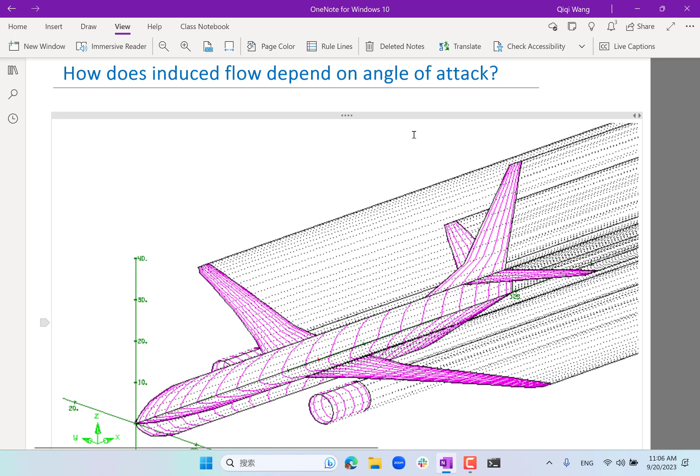So today is the first lecture of zooming in. Instead of looking at the far field, we now start to look around the airplane. Around the airplane, it's no longer sufficient to think about the flow as two trailing vortices going from the wingtips to infinity.

We now have to consider that there is a distribution of trailing vortices coming from almost everywhere on the wing. Whenever there is a change, a gradient of lift per span, there is going to be a vortex coming out. The only time when there's no vortex coming out is when you have uniform lift per span, so the circulation around the wing would be constant as you move along the span, and no vortex has to come out.

As long as you have a change of circulation as you move along the span, that change actually has to come out of the control volume. If you draw a control volume where one side is over here, and the other side is over a different location around the span, and you connect these two faces to form a closed control volume...

Any circulation on the green control volume has to be an integral of vorticity going in. Any circulation on the black volume has to be vorticity coming out. If there is a difference in circulation, and given that vorticity cannot have any divergence—meaning the total integral of the flux of vorticity in the control volume has to be zero—then if there's a change in circulation between the green and black contours, there must be vorticity coming out of the red surface connecting them.

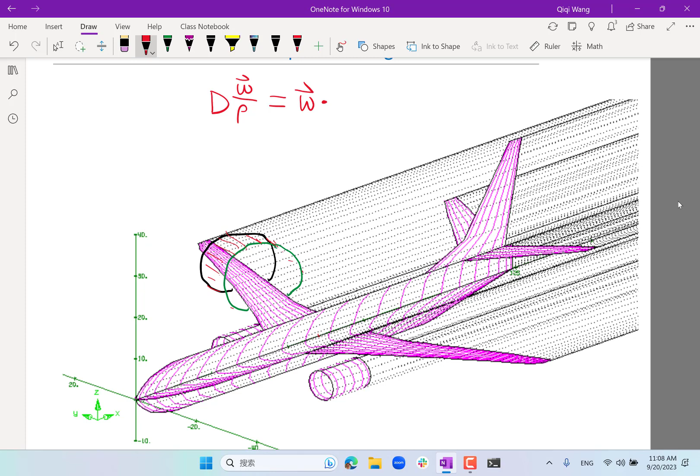We've looked at the evolution of the vorticity equation, which tells us that any place in the flow field where you find non-zero vorticity would be downstream of a solid surface. Remember our evolution equation: the material derivative of omega over rho equals omega dotted with the gradient of the velocity field. This basically says that if omega is zero upstream, there cannot be any material derivative of omega, meaning omega would not increase from the existing zero value.

So the only place where vorticity would be non-zero is in the wake. That means if there's a change of circulation along the span, there's going to be non-zero vorticity coming out.

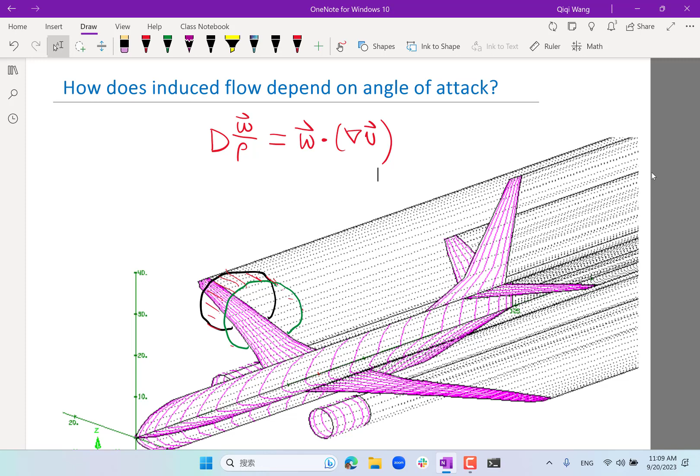So today let's look at first how the induced flow by the collection of vorticities that comes behind the trailing edge, and the vorticities bound in the wing, would depend on angle of attack as we change it.

One of the nice things about incompressible potential flow is the flow field. Let's say the induced flow is UI. One nice property is that this can be expressed as U induced zero at zero angle of attack, plus the angle of attack alpha times UI prime.

So in other words, the induced flow is an affine function, sometimes called a linear function of the angle of attack. For example, if all the airfoils are symmetric and have zero incidence angle to the airplane, then the induced flow at zero angle of attack would be zero, because nowhere has any lift. The induced flow is then just proportional to the angle of attack. If there are any incidence angles or non-symmetric airfoils, there is going to be some fixed induced flow at zero angle of attack, and then the additional induced flow at non-zero angle of attack would just be linear with respect to the angle of attack.

So let's start by looking at why this is the case, and what condition the flow field has to satisfy. First, in the free stream, away from the airplane and away from the lifting surfaces, the flow has to be a valid flow field, and that is automatically satisfied if you construct the flow field as the summation of the induced flow fields by a collection of vortices. The induced flow of any vortex is a valid flow field, and if you add them together, it is going to be a valid flow field. So that is correct by construction. But there is an additional constraint the flow field has to satisfy.

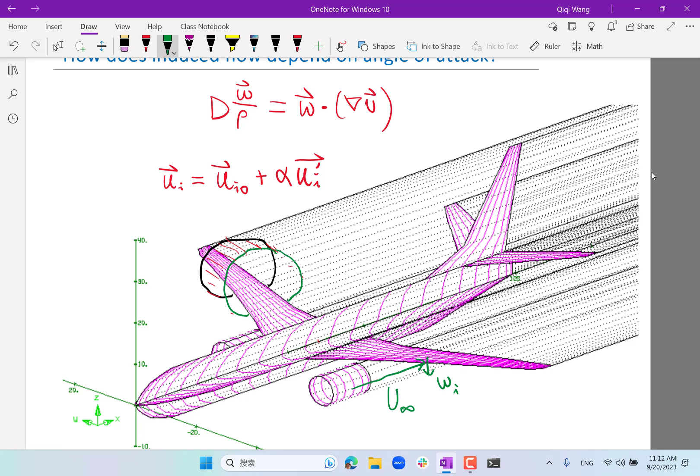That is the relationship between induced flow on the wing. So if you have, for example, an induced downwash, let me just call it W induced on the wing — that induced downwash combined with the free stream, U infinity, forms an angle of attack. The free stream has an angle alpha with respect to the axis of the airplane, so that's basically the angle of attack of the airplane. So U infinity combined with the induced flow is going to modify the angle of attack on this particular cross-section of the wing, and that modified angle of attack leads to a lift.

The angle of attack plus the airfoil cross-section is going to determine the sectional lift coefficient on the cross-section. And that is going to give us, through the Kutta-Joukowski theorem, the lift per span — lift per span is equal to some function of the local circulation on the cross-section. That's something you should have studied in unified fluids.

So let me just spell it out: the Kutta-Joukowski theorem. Lift per span is the circulation times rho times U infinity. So basically that relates how much circulation you have inside the wing, around the wing, with how much lift you have.

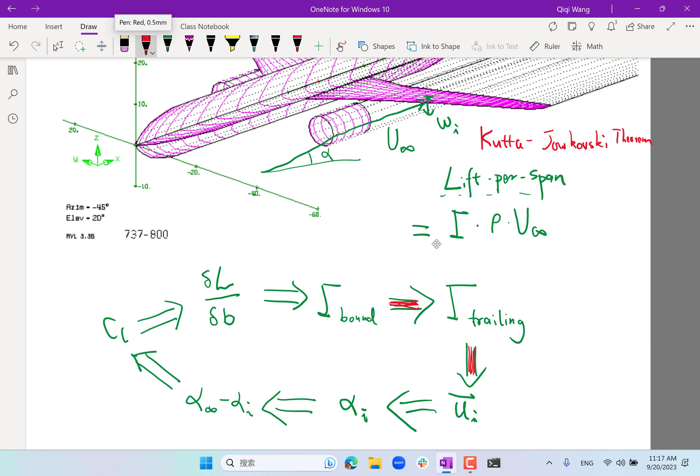From the bound vortex to the trailing vortices, it's a non-local dependency, because you have to take the derivative of the bound vortices to get the trailing vortices. And from the trailing vortices to the induced flow is also global. It requires an integral, not just a derivative. You have to integrate the induced flow coming from all the trailing vortices. And the rest, from the induced flow to the induced angle of attack and to the angle of attack seen by the cross-section to the lift coefficient, these are all local effects.

What do you mean by induced angle of attack? That's a good question, let me explain further. The induced angle is the angle between the free stream and the flow field seen by the cross-section.

The green arrow is the free stream. If you add the free stream with the induced flow, the purple arrow is the flow field seen by the cross-section. The angle between the free stream and the flow field seen by the cross-section is alpha induced. That is why the actual angle of attack seen by the cross-section is alpha minus alpha induced. Let me call it alpha infinity, and the green one is alpha infinity.

Make sense? It's the alpha infinity minus alpha I that determines the local lift coefficient.

Let's start to look at this dependency here, and especially the linearity of it. From the lift per span to the strength, the circulation of the bound vortex, as we see from the Kutta-Joukowski theorem, it's a linear relationship. If the lift per span doubles, the circulation doubles.

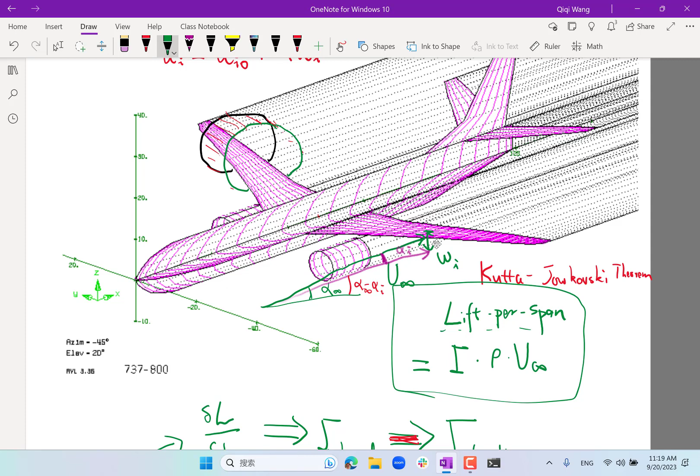And from the bound vortices to the trailing vortices is also a linear relationship. It is basically taking the difference between the circulation on different cross sections to get the strength of the trailing vortices. A simple difference is a linear relationship.

And from the trailing vortices to the induced flow, that's the Biot-Savart law. That's also linear. If you remember the integral, if the circulation doubles, the induced flow would just double.

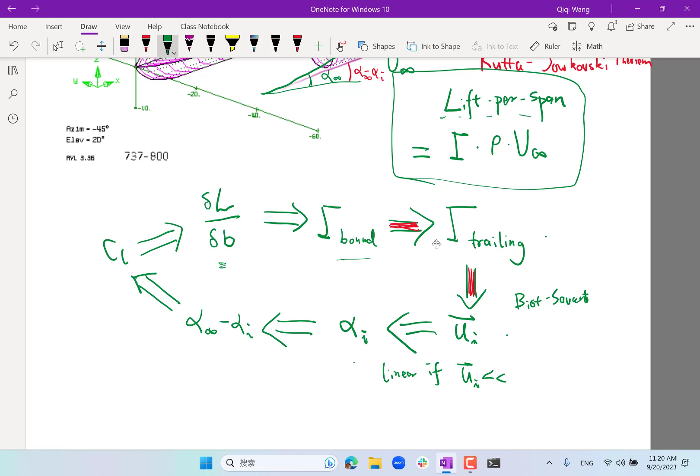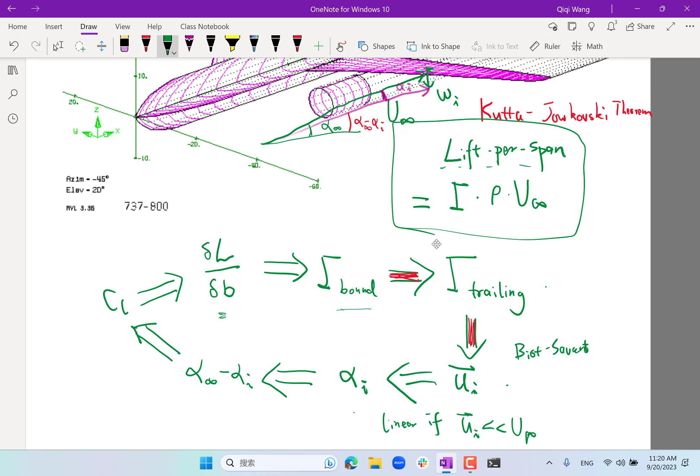And from the induced flow to the induced angle, we are just dividing the vertical component of the induced flow by the free stream velocity to get the induced angle. This is linear if ui, the induced flow, is much less than u infinity. So if the induced flow is very small, the alpha i angle would just be computed by dividing wi by u infinity.

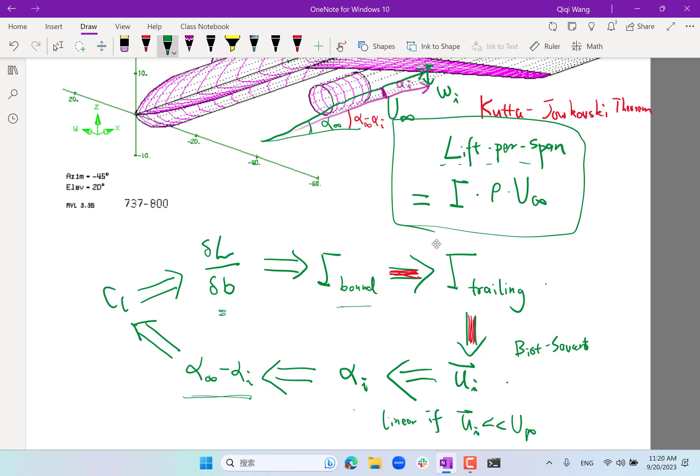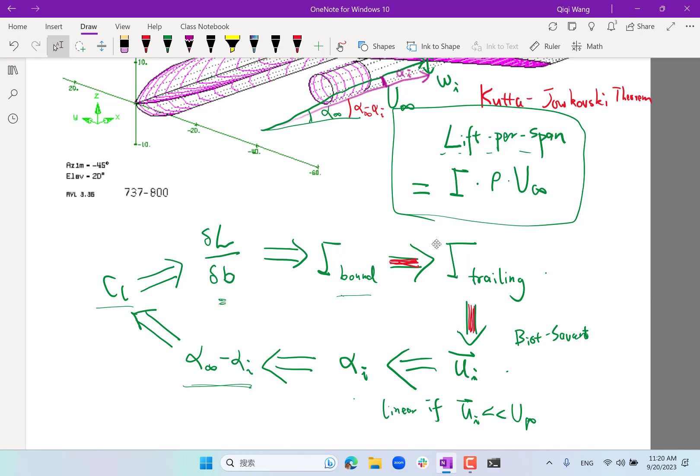And then from the angle of attack seen by the airfoil to the lift coefficient, as we learned in unified, if we assume the airfoils are inviscid and use thin airfoil theory, the lift coefficient CL would be equal to CL0 at zero angle of attack plus 2 pi times alpha infinity minus alpha I. Again, it's an affine relationship.

And of course, from CL to the lift per span, it's just a multiplication of half rho v infinity squared times the local chord length. So that completes all this relationship.

Every relationship is linear or affine, which means we get a global, not local, system. The linear relationship may be between the induced velocity at one point and the trailing vortices at a different point, but the whole thing is linear, meaning if we put all of them into equations, they are all linear equations - a system of linear equations. You can, for example, use the strength of the bound vortices as unknowns and solve them, and the result is going to be a linear or affine function of alpha infinity.

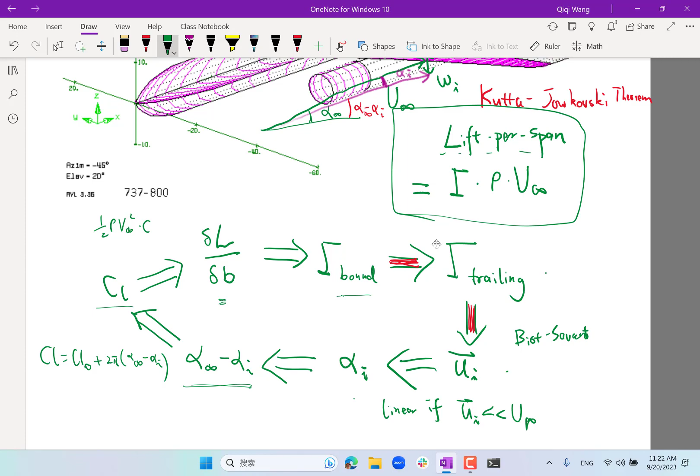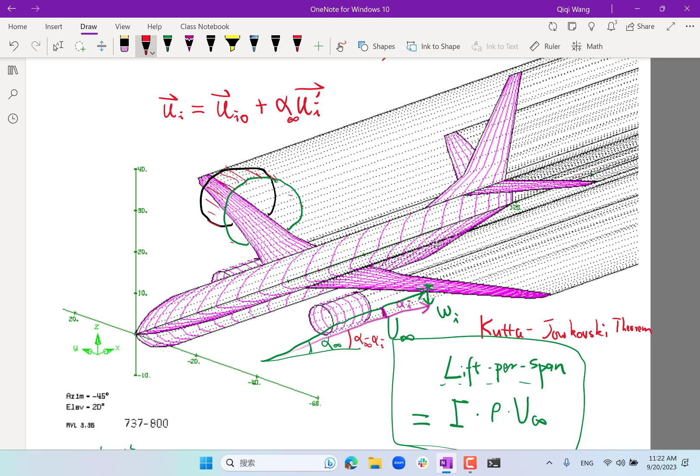This logic tells us that the induced flow can be expressed as a zero angle of attack induced flow plus a linear term that depends on the angle of attack seen by the entire airplane. Any questions on this linear relationship and the solution being linear with respect to alpha infinity?

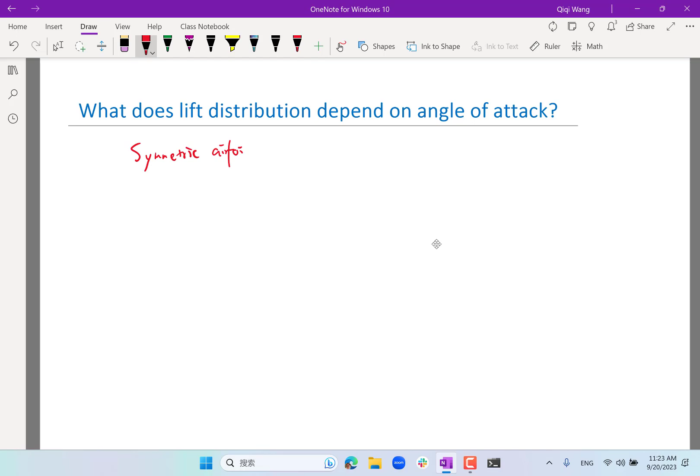Okay, so as an example of how the lift distribution depends on the angle of attack, let's review the optimal elliptical distribution on the elliptical wing. Let's assume we have symmetric airfoils, an untwisted wing, and an elliptical planform.

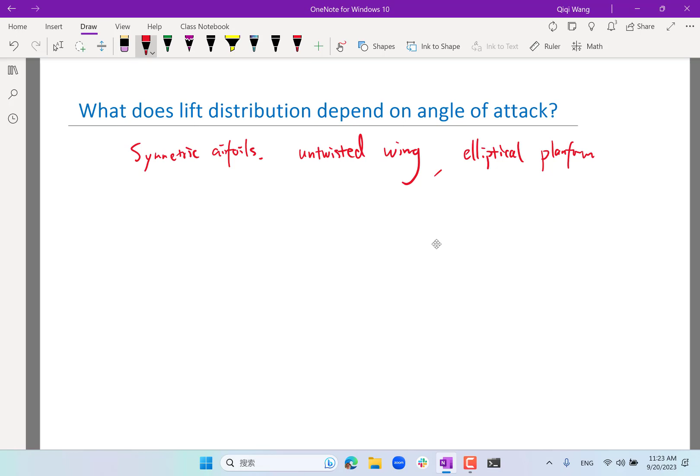Okay, so we know that at any angle of attack, an elliptical distribution is going to create a uniform downwash on the entire wing. I think at least when I look at old unified notes, there is the derivation where the induced flow is actually equal to the lift coefficient divided by pi times the aspect ratio, which is b over c. Have you seen this equation? Yes? No? I see some people shake their head, some people nod, so I'm a little confused.

Okay, so have you analyzed the elliptical distribution as being optimal in the sense of least induced drag? Have you looked at the elliptical lift distribution at all? No? Not really? Okay.

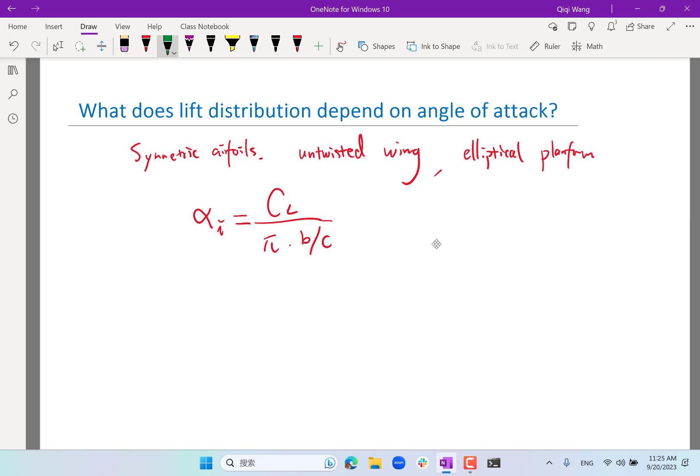Sure, so maybe the most important thing I should say is let me put some sections on Anderson's for you to read about the elliptical distribution. The derivation itself is not as important, the most important thing is the intuitive understanding. So let me draw a box over here that introduces the elliptical distribution.

Okay, so if you have a uniform lift distribution, the lift is uniform across the whole span. What is the system of trailing vortices coming out of the wing? Just the application of what we discussed on the previous slide. Where does the vortices come out? Only at the wingtips, exactly. We are only differentiating the lift per span at different cross sections to get the trailing vortices. So the gamma would be concentrated at the wingtips.

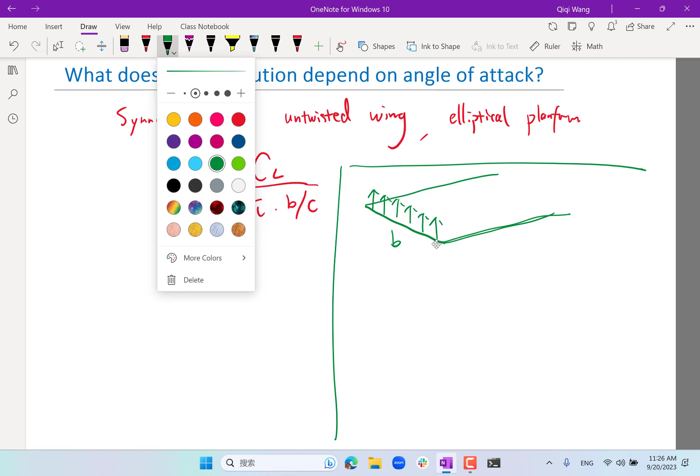As a result, that's something from your homework if you started it. What does the downwash distribution look like along this wing? Is the downwash maximum in the center or maximum at the two ends? At the two ends, right? At the center it has minimum downwash, at the two ends it has maximum downwash. So let me say the green is lift, and the downwash distribution looks pretty much like that.

And as a result, the lift at the two ends is going to be tilted back a lot. If you integrate the tilted back lift, you're going to see a very inefficient lift distribution, in the sense that to create the same lift, it tilts the lift backward by a lot. Similarly, if you look at the induced flow in the far field, you're going to see very high velocity around the concentrated vortices, and lower velocity in the middle. So the concentrated velocities around these vortices introduce a lot of kinetic energy, a lot of low pressure regions.

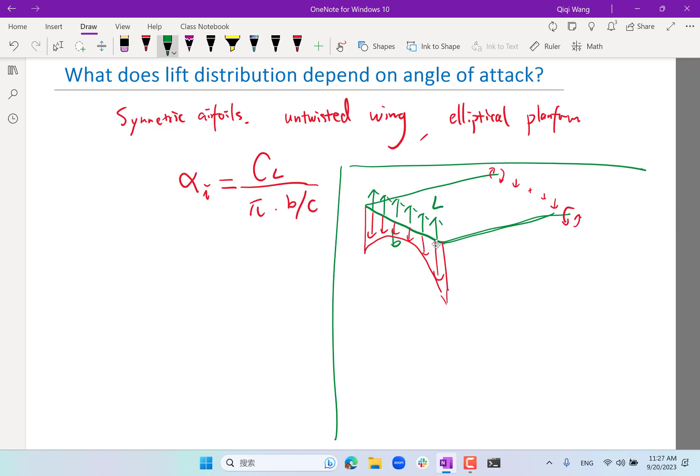That's going to give you a lot of induced drag. So both from a near field and far field perspective, the uniform distribution is very inefficient. An efficient distribution of lift can be analytically worked out to be something that has lower lift per span at the two ends and maximum lift per span in the middle. And the analytical solution turns out to be an elliptical distribution.

So basically the lift per span is proportional to the square root of 1 minus y divided by b over 2, squared. So what that means is that if you draw a line that encompasses the tip of the lift distribution, that line is half of an ellipse. And so if you look at the trailing vortices coming out of that distribution, what does it look like?

Is the vorticity still coming out as two concentrated vortices at the wingtip? No, right? Still, the concentration is going to be maximum at the wingtips because the derivative of this lift per span function is maximum, actually infinity at the two ends. But the strength is going to be complemented by weaker vortices in the middle. These weaker vortices in the middle would actually create an upwash as opposed to downwash at the wingtip, which balances with the downwash created by the two concentrated vortices at the wingtips, and as a result, the downwash from this elliptical lift distribution would actually be uniform.

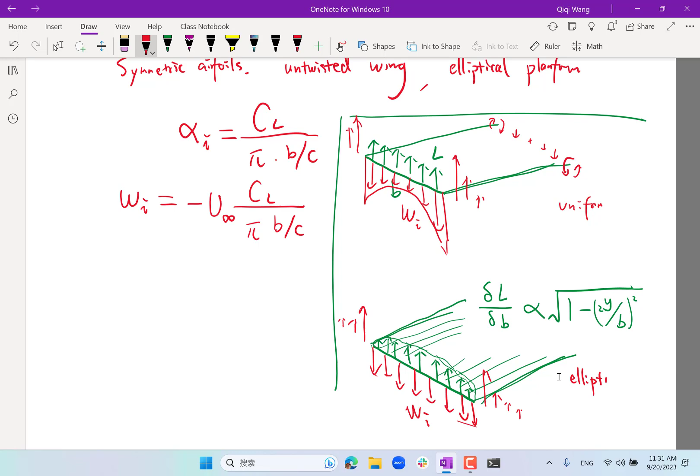Beyond the wingtips, there is still kind of an upwash that decays as you go to infinity, qualitatively similar to what happens for the uniform distribution. So this is uniform, and this is elliptic distribution. Okay, any questions on this?

So that's I think the extent of what was previously taught in Unified about this. No, it's no longer. Okay, so on 3D finite wings, what is the end of the lectures? Like where did you go to?

Okay, anybody remember what is the extent of the coverage on 3D wings? We did the kinetic energy induced drag, the elliptical lift distribution, induced drag, but not much else.

Okay, so the derivation is a little bit mathematical. It's not really that important to actually follow completely. The only thing you need to know is that for a fixed span, this kind of distribution is optimal. There is a bit of discussion in the sense that the actual aircraft strictly follows the elliptical distribution, that's at the time when this derivation first came out. But later on, people found out that if you don't fix a span from a strictly aerodynamic point of view, instead of fixing a span, it is more efficient to fix the weight of the wing and optimize the induced drag.

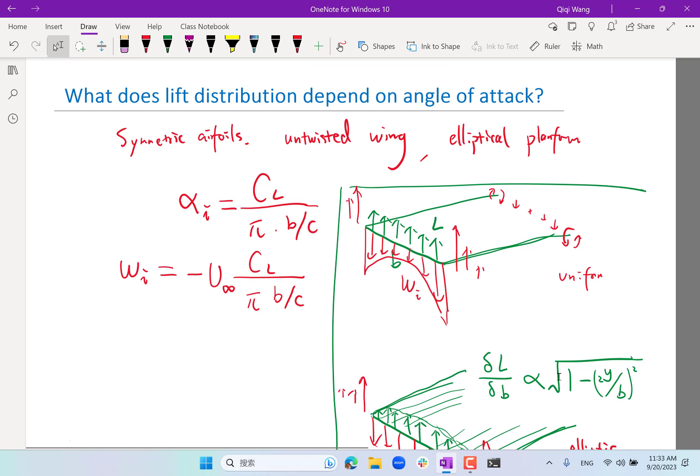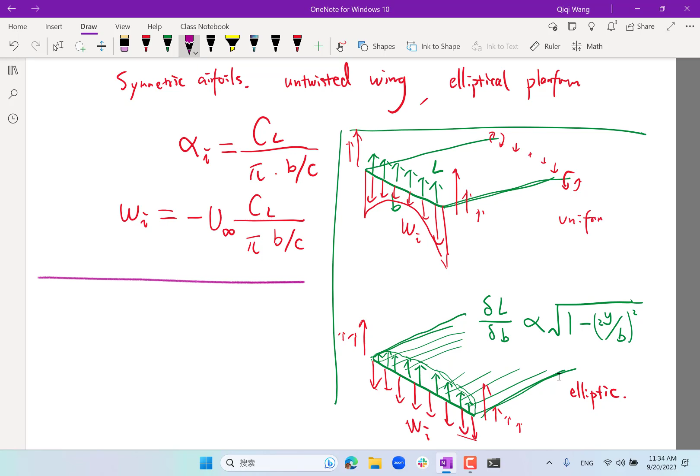Okay, so this is a special case where you have uniform distribution of lift, and if you do have an elliptical lift distribution, but actually have an elliptical planform, let's actually look at what happens. A planform means that not only the lift distribution, but the chord length is proportional to the square root of 1 minus 2y over b squared. So that's a wing that looks basically like an ellipse. So that's what the airplane would look like roughly.

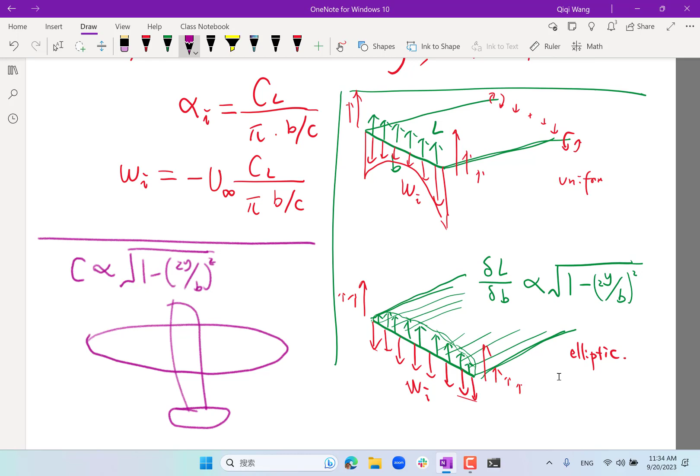Okay, so if you have a chord distribution like that, you can actually work out what happens. Not only is the lift distribution going to be elliptical at any angle of attack, that's basically what's special about the elliptical planform. This is because everything in the loop is consistent. So now let's actually try to go through this exercise, go through the loop for this elliptical planform with a symmetric airfoil and zero twist, okay, to see what's happening throughout this loop.

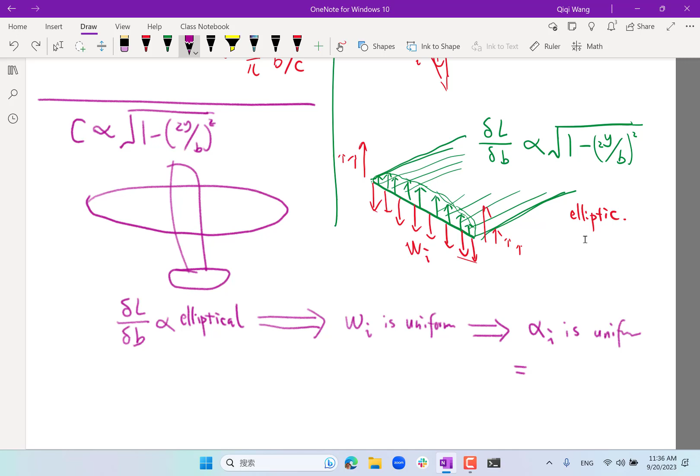So first of all, let's see that if we have a lift per span that is proportional to this elliptical function, what that means is the trailing vortices are going to come out in a particular way that leads to the induced flow being uniform. If the induced flow is uniform, then the induced angle of attack is uniform. And actually, we know how it works out, it works out to be basically the induced flow divided by u infinity, which gives us the classical formula of the induced angle for an elliptical distribution: CL divided by pi times aspect ratio.

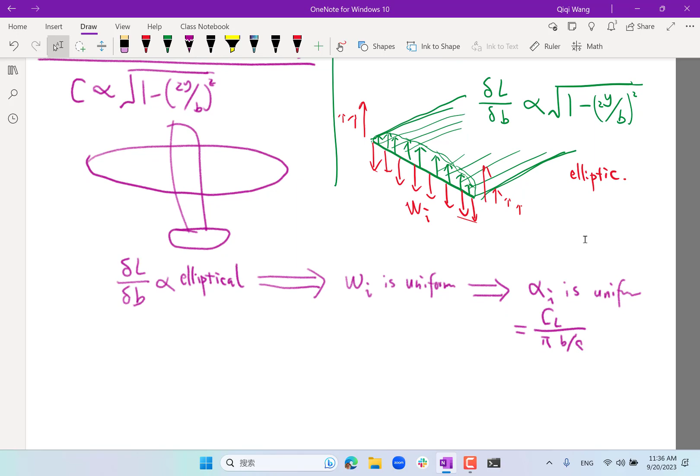Okay, so now if the induced flow is uniform, that means that the angle of attack seen by every cross section is actually the same. So basically alpha infinity minus alpha i would be CL divided by pi b, is actually equal to alpha infinity minus CL pi b over c. And that leads to the lift coefficient. So lift coefficient is, let's assume the thin airfoil theory result to be true, so reality might be a little bit different from 2 pi, but not that much different. So CL is going to be 2 pi times that angle, which means it's 2 pi times alpha infinity minus CL.

And by the way, if every cross section sees the same angle of attack, then the overall CL of the wing is actually the same as each individual uniform CL of the different cross sections. So that actually gives us an equation to solve. And not only that, the CL can be computed as a function of the local angle of attack, it actually is a function of the global angle of attack. And that CL goes back to the elliptical lift distribution, because the CL is actually the same across different cross sections. And to get the lift per span, you just multiply CL by the dynamic pressure, half rho v infinity squared, which is constant for different cross sections, and further multiply by the chord length, which is elliptical. So this is basically because of the elliptical chord distribution.

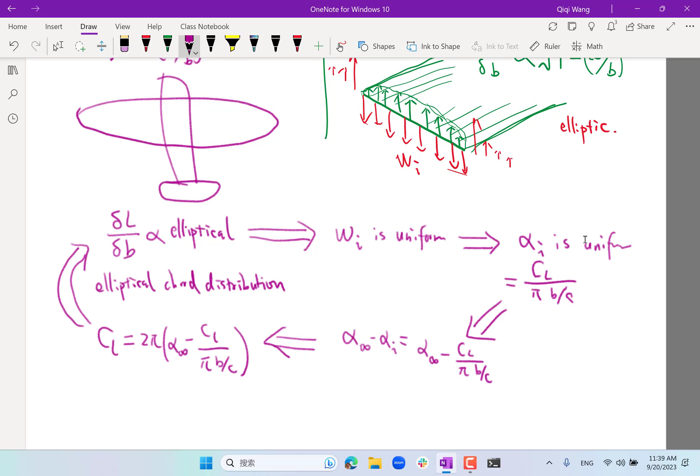This also helps us work out the lift coefficient. If you solve this equation by collecting the terms, you get CL times 1 plus, moving the other CL term to the left hand side, plus 2 divided by aspect ratio equals 2 pi alpha infinity. Or CL equals 2 pi divided by 1 plus 2 over aspect ratio, times alpha infinity. That's nice because it also tells us for different aspect ratios how the lift coefficient depends on the overall angle of attack.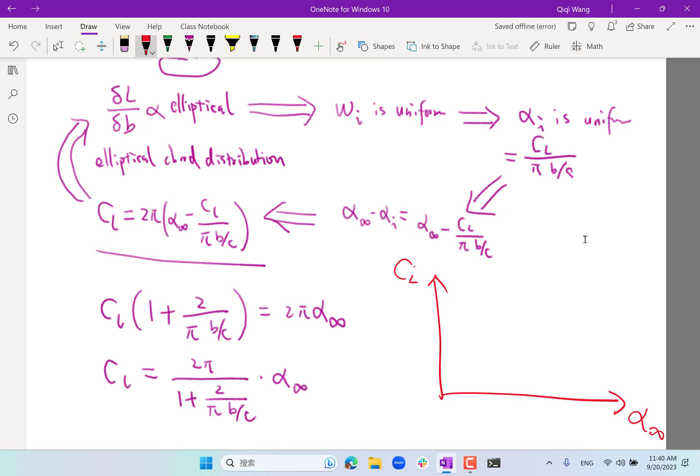So if this is alpha infinity, this is lift coefficient. If you have infinite aspect ratio, the denominator is just 1. You would have a straight line that goes up to 2 pi alpha infinity.

On the other hand, if you have a non-infinite aspect ratio, you're going to have a slightly larger denominator, and the line would be slightly lower. For example, if you have an aspect ratio of 8, then 2 over 8 pi is about 1 over 4 pi. So if B over C is 8, you get 1 over 4 pi, which is about 1/12, so there's about a 1/12 difference between the actual slope you get versus an infinite span glider.

That gives you a sense of how big the discrepancy is. It's not that significant for high aspect ratio, but it really starts to bite you if you have an aspect ratio of like 2-3 or something like that.

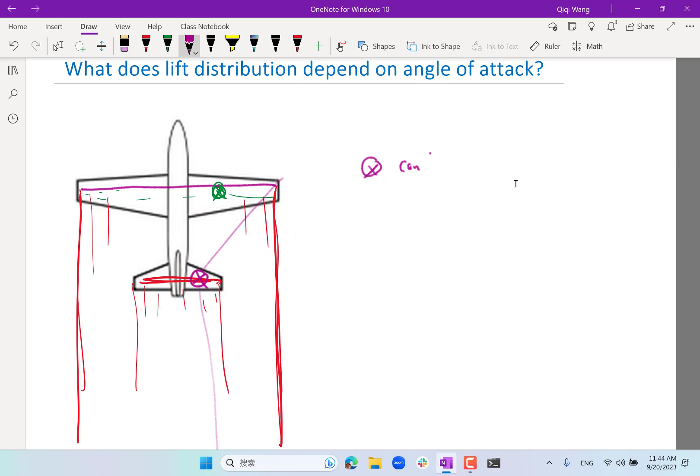So the induced flow on the tail can be several times larger than the green one. And plus, the horizontal tail does not affect the wing much because all the vortices go downstream, and if you think about downstream vortices affecting upstream flow, it's very minimal. But it does have an influence on itself.

In the previous slide, we looked at how the induced flow alpha I is a function of CL. So the alpha I on the horizontal tail can be a much stronger function of alpha infinity, the angle of attack.

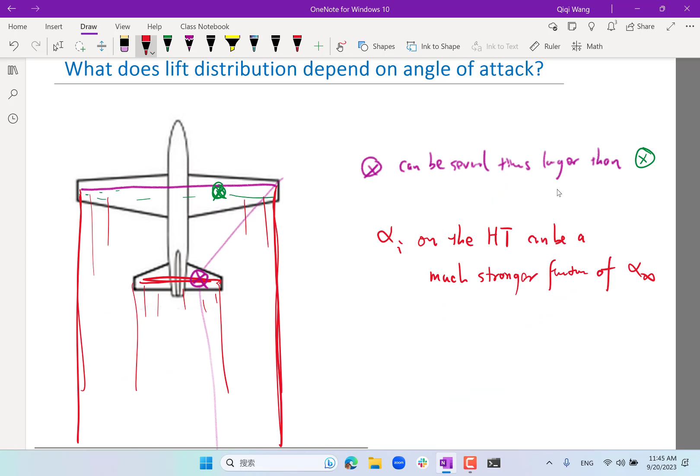So what is the result of that? If you think about the previous plot, the gap between these lines is due to the induced angle of attack. So what this means is that if you think about the CL on the horizontal tail versus alpha infinity, the deviation of that from the 2 pi alpha infinity line, the gap, is going to be much larger.

All right, does it make sense?

Basically, if you change the overall angle of attack, the strength of vortices on the main wing increases, and the induced flow from the main wing's vortices on the horizontal tail is much stronger than the effect of induced flow on the main wing itself. As a result, the angle of attack seen by the horizontal tail is not going to be as sensitive to the overall angle of attack as the angle of attack seen by the main wing.

So what's the consequence of that to the effectiveness of the horizontal tail? Why do we use horizontal tail over here? I guess you have more control, like more control and stability.

Yeah, more control is one thing, stability is another thing. Control is done by the elevator moving, either changing the camber or moving the horizontal tail as a whole. But the horizontal tail existing here is for stability.

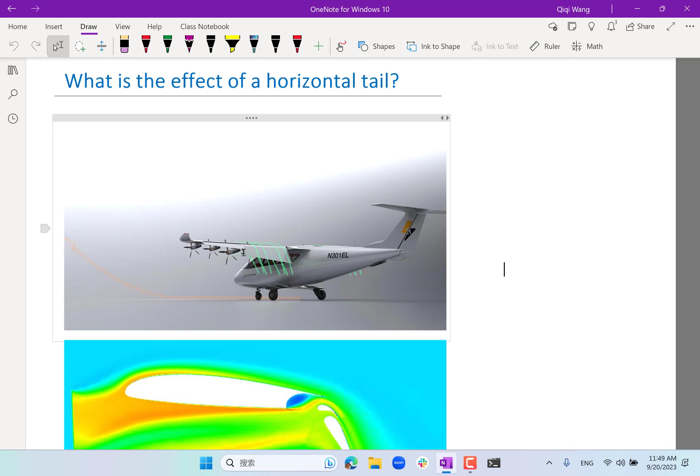So that's actually especially important if you look at some of the newer concepts. One of the startups coming out of this department is called Electra.aero, and it uses electrical propulsion to have an array of propellers blown onto the main wing, with a very large set of flaps.

As a result, you can imagine the flow - this is a CFD calculation - the flow can deflect at extreme angles. The result is the vortices coming out of the tip of the flaps can be extremely strong.

And as a result, if they placed the horizontal tails - notice the location of the horizontal tails. Where is it? Is it different from the usual placement of horizontal tails? They put it on top of the vertical tail, as opposed to over here. Why is it?

Yes, to put it as far away from the vortices which come down as possible, to actually avoid as much as possible the reduction of its effectiveness.

This is a very interesting scenario. If you place the horizontal tails down as opposed to up, in takeoff and landing conditions, the horizontal tail actually does harm rather than help for the stability of the airplane. At some location, the horizontal tail effectiveness, which is proportional to the slope of lift with respect to angle of attack, is actually going to be negative. The gap can be so large that this line can actually be negative for extreme scenarios.

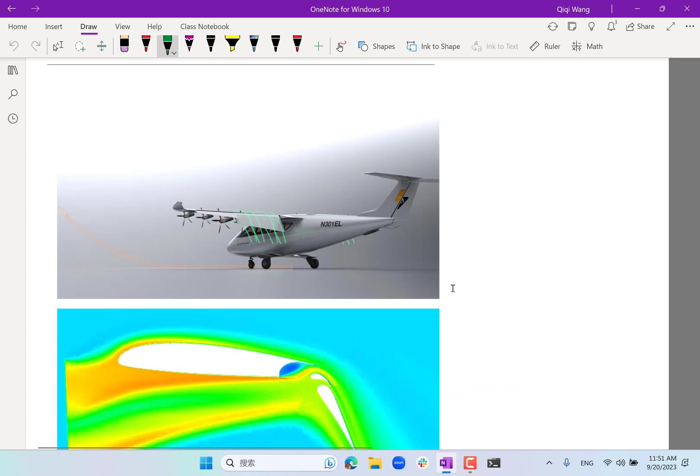Questions? No? Okay, so let's actually analyze some additional scenarios.

We looked at straight wings. For example, if you have a forward swept wing, the vortices come out like that, and the inner part of the wing is almost similar to a horizontal tail - it's located behind the start of the wingtip vortices. So the effect of the wingtip vortices on the inner portion of the forward swept wing is actually stronger than it is for the straight wing.

So for the forward swept wing, the inner portions almost have a similar effect as the horizontal tail, in the sense that the sensitivity of their angle of attack with respect to the free stream angle of attack is going to be less sensitive.

It's going to be a lot smaller than 1 at the root of the wings. Now for the normal backward swept wing, it's actually the opposite. So for the backward swept wing, actually a very interesting scenario is the opposite of this.

If you have a bunch of vortices coming out of the wing, think about the extreme tip of the wing. It is subject to a small part of the vortices from the very tip, but it is subject to the upwash of less strong but more vortices from the inboard of the wing. The effect from the inboard trailing vortices is stronger because this portion sees more of the angle. So as a result, for some sweep wing designs, the sensitivity of the tip angle of attack with respect to the free stream angle of attack can be greater than 1.

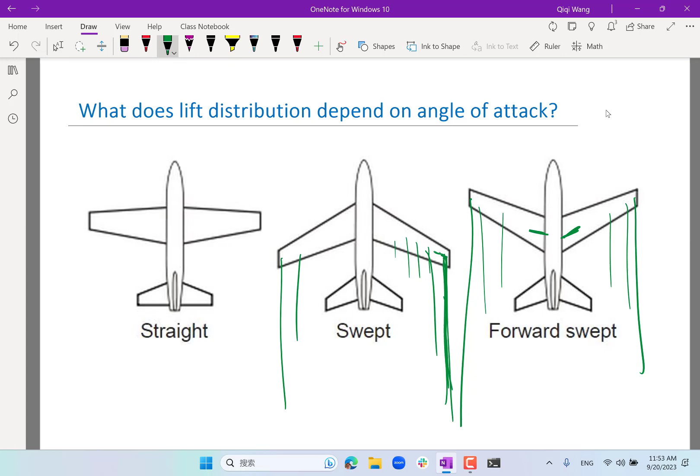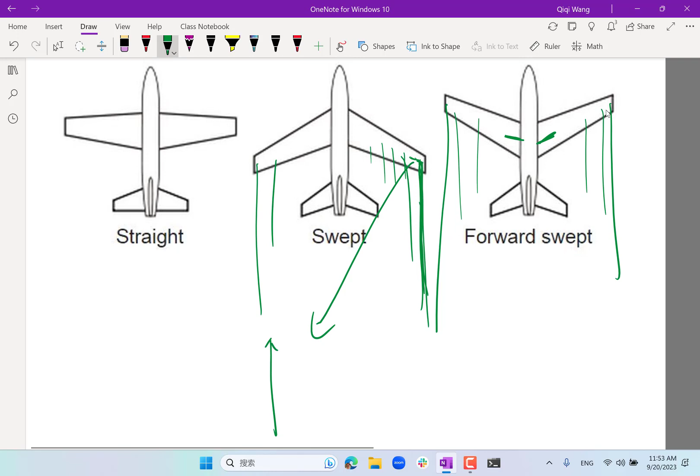So if you look at the tip cross section, and if you look at the alpha infinity CL curve, this can be slightly greater than 2 pi alpha infinity. While for the forward swept case, the inner part of the wing has the least slope.

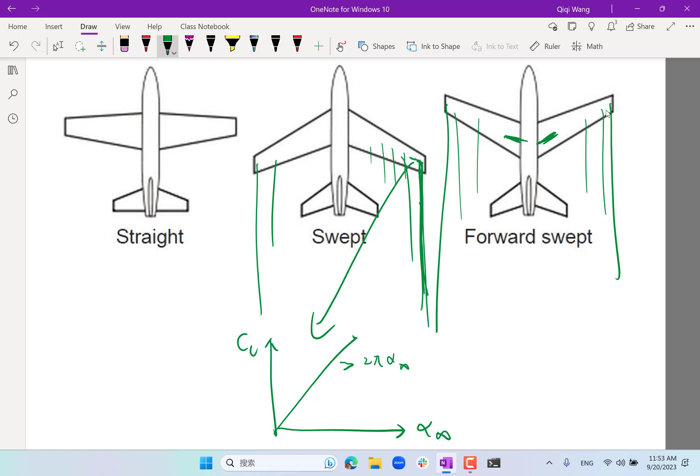This kind of analysis is going to be useful when you want to optimize the lift distribution for multiple angles of attack. Not only do you have to consider the distribution of the chords, but if you want to optimize the lift distribution for multiple angles of attack, you have multiple things you can tune.

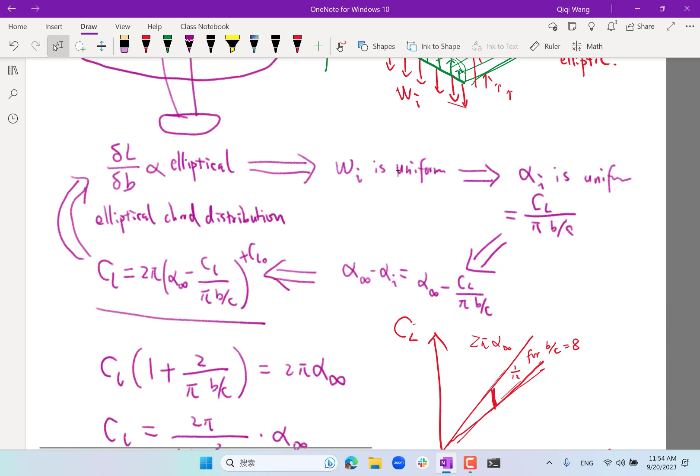I should add something over here - there is also plus CL0. On this slide, you can tune CL0, which can be tuned by changing the airfoil cross sections and twisting the wing. If the different cross sections are at different incidence angles, then CL0, the zero angle of attack CL, is going to be different. You can also change the planform, how the chord depends on the Y locations. That changes how the CL translates to the lift per span.

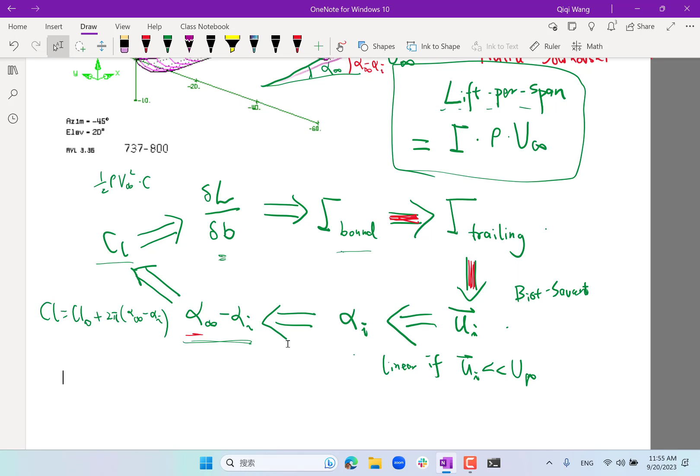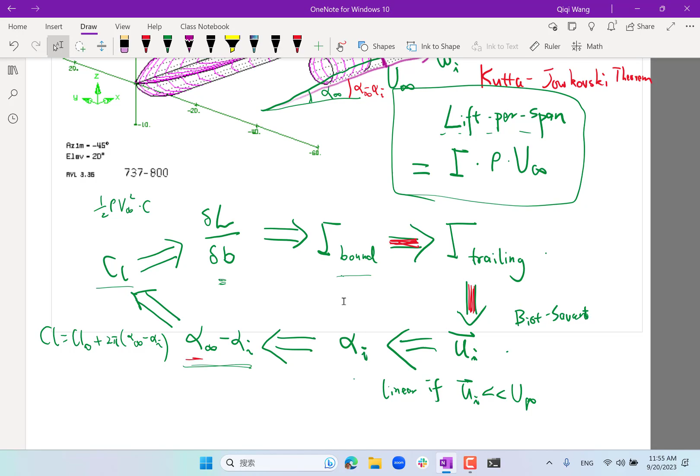Basically, these two things are the main things you change once you have a sweep. The sweep is going to change how the trailing vortices affect the induced flow on the wing. If you have different sweep angles, the sensitivity of the induced angle with respect to the strength of the trailing vortices could be quite different. So this is all good considerations you can do for wing designs, especially for designing the planform of the wing.

Let me say a little bit more about the lift and induced drag in ground effect - that's another consequence of the additivity of potential flow. If you have a wing operating near the ground, the effective flow field is the trailing vortex system plus an image vortex, which is basically the opposite. If you think of the ground as a mirror, and you look at the trailing vortices inside the mirror, these are the vortices that are beneath the ground. The result is that the induced flow field on the ground is going to be exactly horizontal - there is no vertical component because the vertical components all cancel out.

You can look at this whole system to analyze the lift and induced drag of the airplane in ground effect. I'll jump to the conclusion: the sensitivity of lift coefficient with respect to the free stream angle of attack is going to be much closer to the infinite span case than when the airplane is away from ground effect. Also, the kinetic energy and pressure downstream due to the vortex system is going to be significantly reduced, especially when this image vortex is closer to this vortex than the distance between the two wingtips. So if the height over B is small, then the majority of the induced drag can almost be eliminated by flying in ground effect.